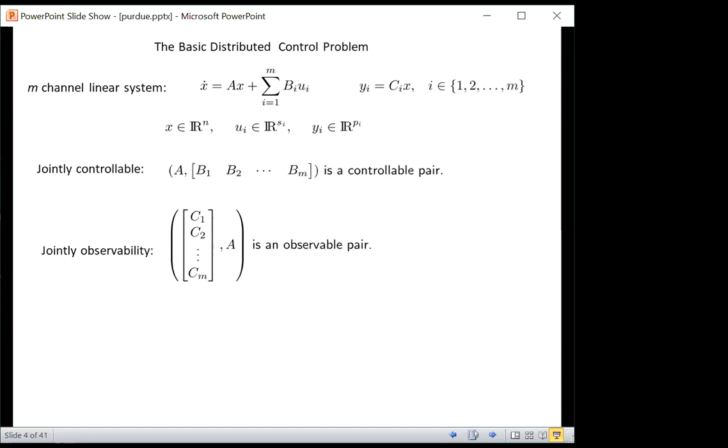So say a little bit about what an agent can do. An agent can only adjust input UI and can only utilize a vector W of signals which it gets from its neighbors. The specification of who agent I's neighbors are is part of the problem formulation.

Let's let script N sub I denote the set of labels of agent I's neighbors, including itself. Neighbor relations are conveniently described by a directed graph, which is called a neighbor graph.

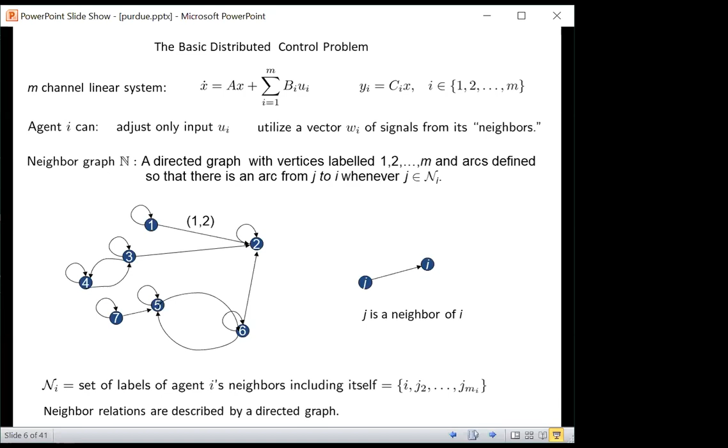So what is a neighbor graph? It's a directed graph of vertices 1 through M, with arcs defined so that there is an arc from vertex J to vertex I whenever agent J is a neighbor of agent I. A very simple idea. Here's a picture of a typical neighbor graph, and what you notice is that there are self-arcs at all vertices because each agent is taken to be a neighbor of itself.

What about this vector W? In the case of distributed control, W is a vector of signals which are available to agent I. W consists of its output and the outputs of its neighbors, and a bunch of other vector-valued signals.

These signals should be thought of as part of the state of the controller for agent I. So this is part of the state, and this is the rest of the state. The distinguishing feature is that Xi is shared, whereas Zi is not.

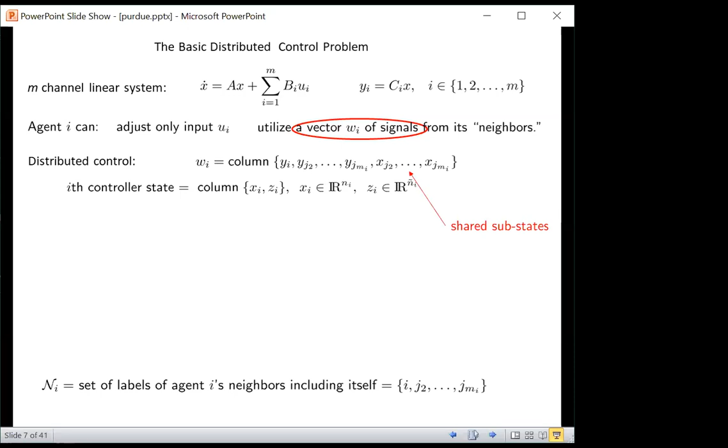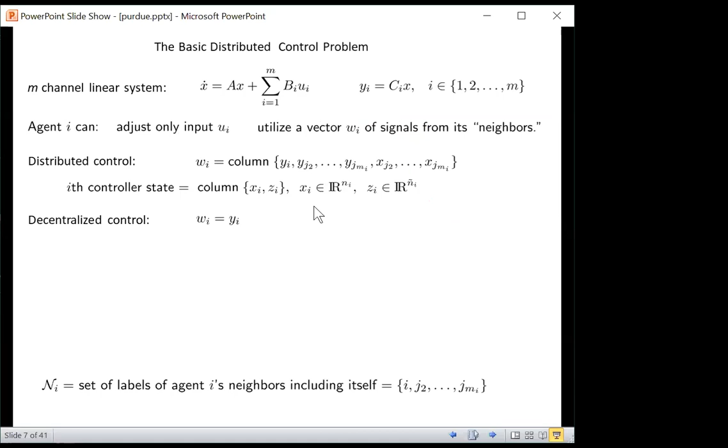Agent I knows the shared substates of its neighbors, or say it gets those by communication. We can contrast this with decentralized control, in which case agent I only knows its own output and nothing else. There's no network involved, and in this case, the ith controller state is just Zi.

In either case, by a local control, we mean a linear system into which goes Wi and out of which comes Ui. This system is going to be of dimension Ni plus N wiggle I, the dimension of these two states. So with this much of a setup, we can state the problem.

The problem for a given Ni is to find integers Ni wiggle and an Ni plus N wiggle dimensional linear controller which exponentially stabilizes the system with a prescribed convergence rate. That's the problem, which to me is the number one problem in distributed control. Surprisingly, it's a problem which has not really been addressed very much in the literature, probably because it appears to be hard.

One way to try to solve this problem is to use what I'll call distributed observer-based control. So this is a lot of words. The first thing I want to do is to tell you what I mean by observer-based control. Then the next thing I'm going to do is tell you what I mean by distributed observer. And then I'm going to put those two things together to get a distributed observer-based control.

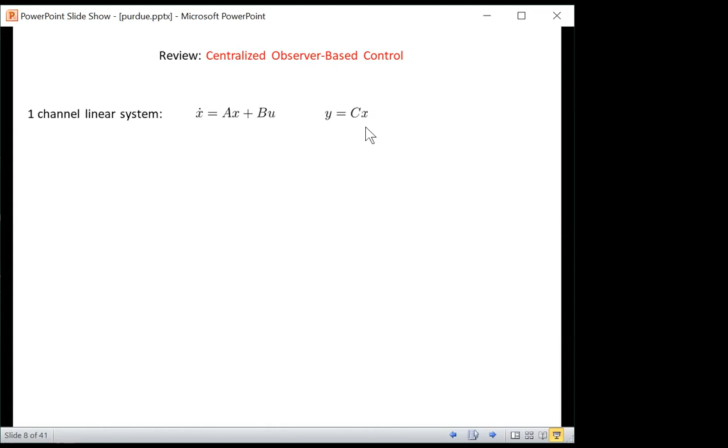So first, just a brief review of centralized observer-based control. Most of you have seen this before. One starts with what we could call a one-channel linear system, a standard linear system.

The first step would be to design a state feedback law to endow the closed loop with some desired properties. And F could come from any one of a number of places. It could come from a pole placement algorithm, it could come from a Riccati equation if one is doing linear quadratic optimal control, or it could come out of an H infinity problem. It's a very general thing, and I'm not too concerned about that.

So the problem with this is that X is not presumed to be known. And so what one does is appeal to the concept due to Herbert Simon from the 1950s called certainty equivalence, which says to replace Fx with an estimate Fx hat. X hat is intended to be an estimate of X, and to treat it as if it's correct even though it may not be. That's what certainty equivalence means.

And if you do that, the dynamic of the process changes to this. And the next thing is to write down an equation for an estimator. This is the typical equation for either an observer or for a Kalman filter. One chooses the matrix K to give the matrix A plus KC some desirable features. Again, if it's a Kalman filter, using a Riccati equation.

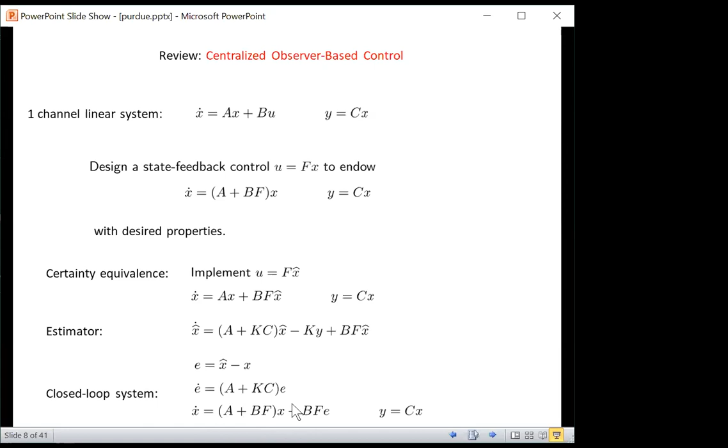We're not going to dwell too much on this, but I am going to emphasize one point, which I'll call the cancellation rule, which has to do with where this comes from. The cancellation rule means add to the estimator the same signal which is going into the process. So you see it right there.

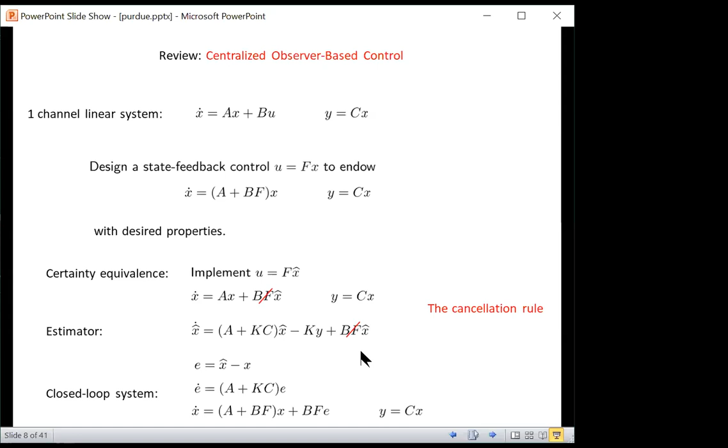The reason for doing this is when you do the calculation to compute the differential equation for the state estimation error, these two quantities cancel. That is the effect of that is what I mean by the cancellation rule. This, of course, is all well known, but perhaps this point is not being emphasized enough. And in the case of distributed control, this becomes a big deal. So I will return to this point later.

Next, I would like to talk a little bit about the idea of a distributed observer. So in words, the distributed observer idea is for each agent to build an observer, possibly with communication between agents, so that each agent is able to get an asymptotically correct estimate of the system state.

Surprisingly, even though people have been talking about distributed observers and distributed Kalman filters for, I would say, 20 years, only in the last 4 or 5 years have provably correct distributed observers begun to emerge under reasonably general assumptions. There are many, many open questions. For example, there's still no really solid theory of distributed Kalman filtering, or in fact, there probably never will be.

Maybe what one needs to do is to change the concept of a Kalman filter for the distributed case. I don't know, but it's still very much an open area, and even distributed observers is an evolving subject, and there are many observers, 5 or 6 I can think of, with different properties. I'm going to be talking using one in this talk.

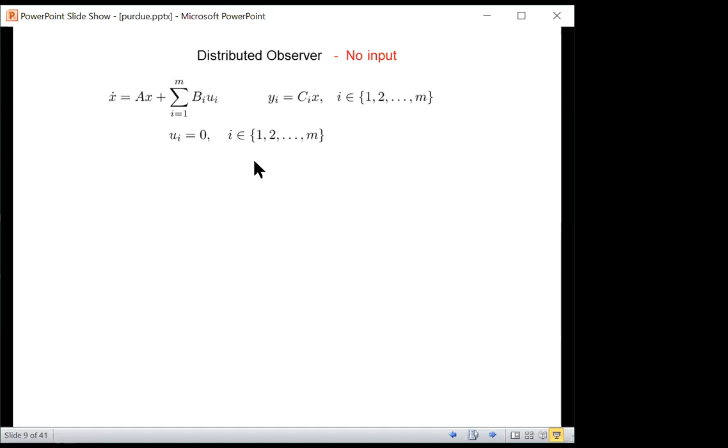All the observers are for the multi-channel system, but I'm first going to talk about the observer with no input. So we're going to assume that U equals 0. Why? Because just about every distributed observer out there assumes that the input is 0, or it is some signal with some very special properties, like it goes to 0 or something like that. The problem with having non-zero inputs, I'll point it out a little bit later.

So the observer in particular that I will be discussing is this. Don't worry, I'm not going to go into the details of these equations in any depth. I will say that the integer q is picked from the set of integers 1 through m, and it could be any integer. Delta iq is the Kronecker delta, which means if i is not equal to q, the differential equation involves all these terms except for the last one. When i equals q, we get the add-on of this system.

So agent i uses, for all agents except the qth agent, an equation like this, and the qth agent uses an equation like this with this term added. The dimension of the states of these subsystems are all n, because each xi is supposed to be an asymptotically correct estimate of x. And the dimension of z turns out for the observer I'm talking about to be m-1, where m is the number of agents.

So that's kind of a picture of the observer, and there are a lot of matrices here which one would choose in order to make the observer have some nice properties. But rather than go into that, I'm not going to.

Let me just find the state estimation errors, just as what I did for the centralized case. The dynamics give rise to an error equation like this, and the z equation can be written with e's on the right. We call this the error dynamics. If you look at it, like the centralized case, it's a system of differential equations with no forcing function—sort of an autonomous system.

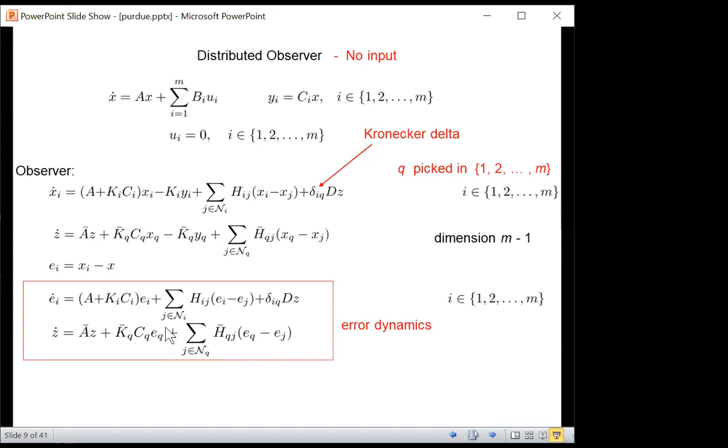The idea of this observer was developed by Nuno Martins at the University of Maryland and his student Parks, and they published a paper on this which appeared in the Transactions of Automatic Control in 2017. It's a nice observation. I think one of the more interesting things is that they discovered that in order to make progress with this, they needed to appeal to classical ideas from classical decentralized control, and I will say something about that a little later on.

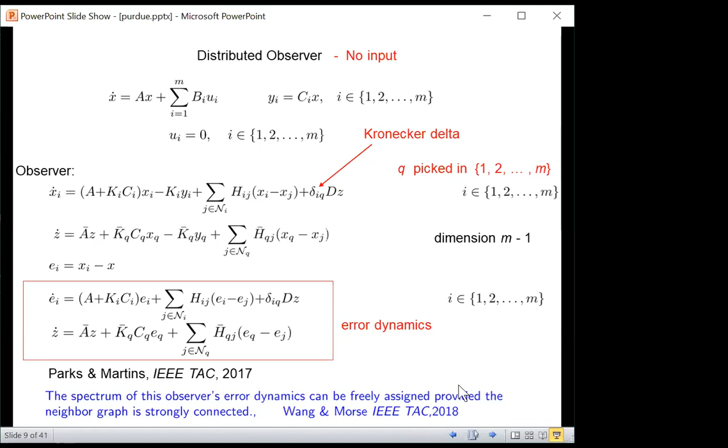A little more recently, it was shown that this particular observer's spectrum can be freely adjusted or freely assigned, provided the neighbor graph is strongly connected. There are other results, but I think for this talk that's fine. That's a paper that appeared in the Transactions Automatic Control in 2018. So that's pretty much the story with this distributed observer at this point.

So what I want to do now is to look at how one would use an observer like this when there's an input, which is what we need for distributed observer-based control.

So when there's an input, instead of having ui equal zero, we're going to have ui equal Fi x as the first step in the design, and the Fi's would cause the process dynamics to take on this form. Just like in the centralized case, the Fi's can be determined using pole placement, Riccati equations, or H-infinity optimal control. There's really no limitation on how the F's should be chosen, determined by the fact that this is going to be a distributed problem.

So the next step is to note that we can't use X because X is not known to anybody. So we use certainty equivalence and replace X with Xi, where Xi is the state estimate of X generated by local observer i. So this is what agent i implements.

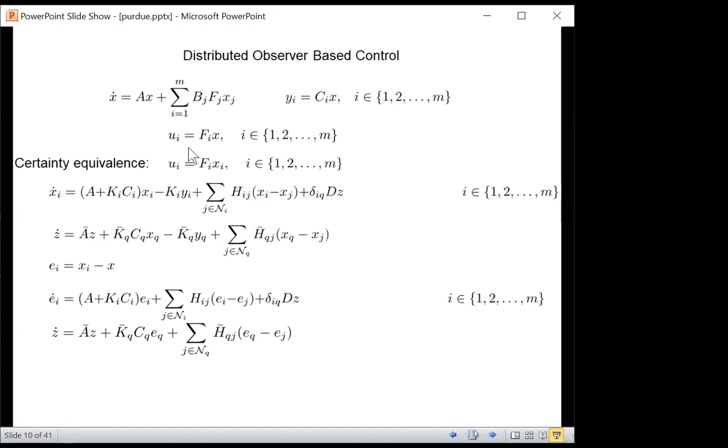Now we have to worry—and that changes the process dynamics to something like this—about the cancellation rule, if we want to end up with an error system that looks like this. And we want that so that we can get this decomposition of the spectrum, of spectra, which we got in the centralized case.

So that says what we should do to make sure the cancellation rule holds is add this term to each of the local observers—this term being the same term that appears here. And that indeed will give error equations that look like this, which is what we want.

Unfortunately, we can't do this without violating the rules of the problem, because J can take on values for which X sub J is not a neighbor of agent i—J ranges from 1 to M. So this won't work. So what do we do?

So you stare at this and you scratch your head, and eventually you say, hey, wait a second—all of the Xi's are supposed to be providing asymptotically correct estimates of X. So if that's the case, why do we have to use Xj here? Why not try using Xi and see what happens?

At this point, I want to pause for a second because I know there are students listening, and I want to say something about research, because this is an example of how research goes. When you start trying to do a new piece of research, generally you start with what you know, and then you have to jump off into the darkness and guess, maybe using a heuristic or intuition or something. You guess that maybe this idea will work—that's part of the creativity of doing research. If you're not willing to do that, you shouldn't be doing research. And if you are willing to do that, then you can't stop there—you have to make sure your idea makes sense. If it happens to be an experimental idea, you run an experiment. If you're developing an algorithm, sometimes you can justify that by just running simulations.

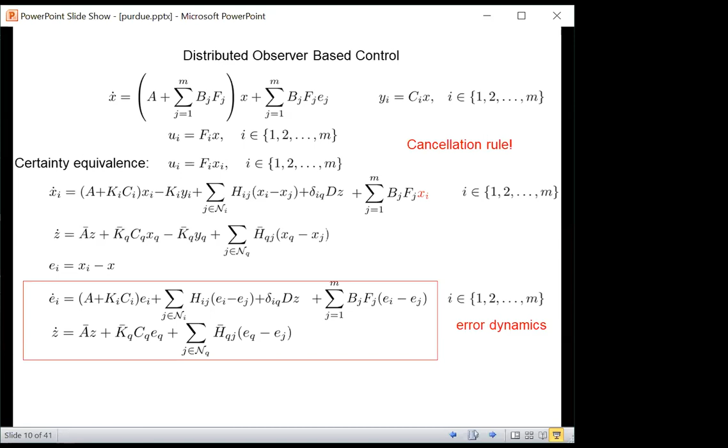All is well. What one can say is this, and this is the theorem: no matter what the Fi are, the spectrum of this observer's error dynamics can be freely assigned, provided the neighbor graph is strongly connected. This particular fact is proved in a paper which has recently been submitted for publication in the IEEE Transactions on Automatic Control.

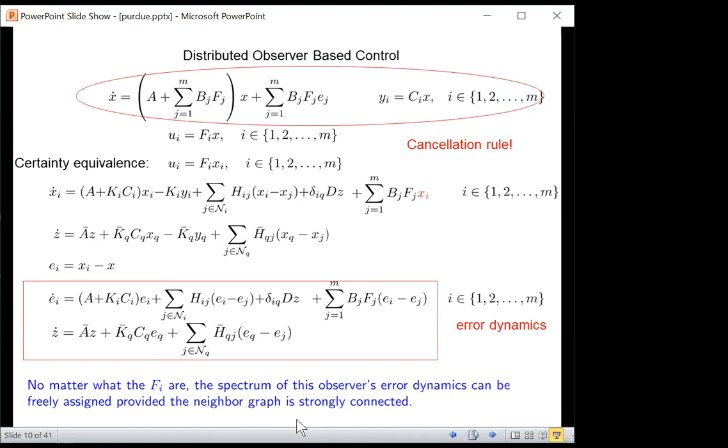And there are various generalizations of this without making the strong connectivity assumption.

So what are the implications of this, which maybe are more important than the theorem itself? The implication is that any jointly controllable, jointly observable, multi-channel linear system with a strongly connected neighbor graph can be exponentially stabilized with arbitrarily fast convergence using time-invariant distributed control. And the way this was established was with an observer-based distributed control.

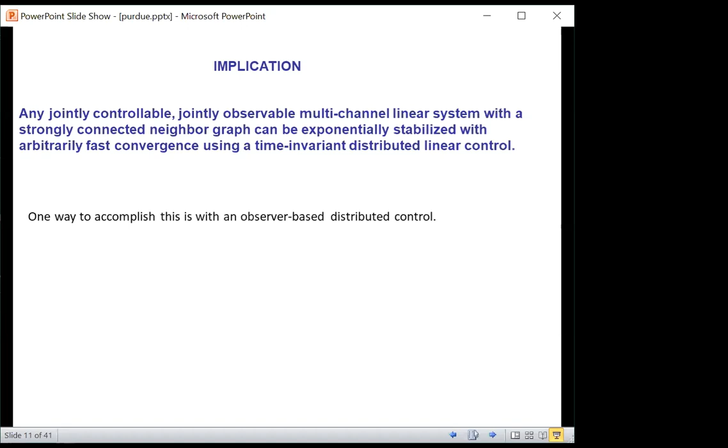Let me now remind you of what the distributed control problem was again. And the reason I want to do that is because there might be some people in the audience, and I know there are certainly some people in the world, who are going to be a little uneasy with this particular approach to distributed control because it relies on an observer.

There was, for example, a paper written by John Doyle in the late 1970s, which pointed out that the use of observers can be problematic—it can introduce robustness issues. And so there are people who prefer not to do things using observers.

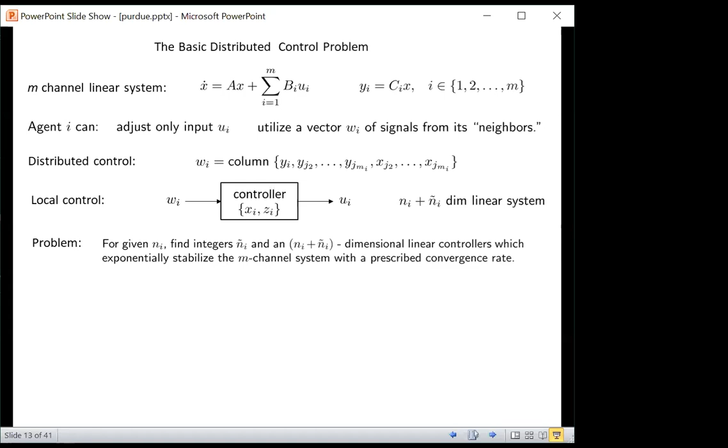And so with that in mind, we asked this question: are there ways to address the problem not necessarily using an observer? Now, I'm not going to answer that question completely, because that's a big question with many dimensions to it. What I am going to do is sketch some of the ideas that really need to be respected if one tries to answer this question, in the hopes that other people may come along and contribute to this problem and come up with better ways to control the system than the distributed observer-based approach mentioned here.

So the first thing I want to do is talk about something I'll call the extended system. This is a very simple-minded idea. The first step is, let's assume that each agent introduces a bank of integrators of dimension ni.

And once that's done, since each agent knows its own—the bank of integrators are going to be part of the controller that agent i implements, and so agent i certainly knows xi. So we should take what it knew before, namely this, and add to it xi. So xi is also shared across the network.

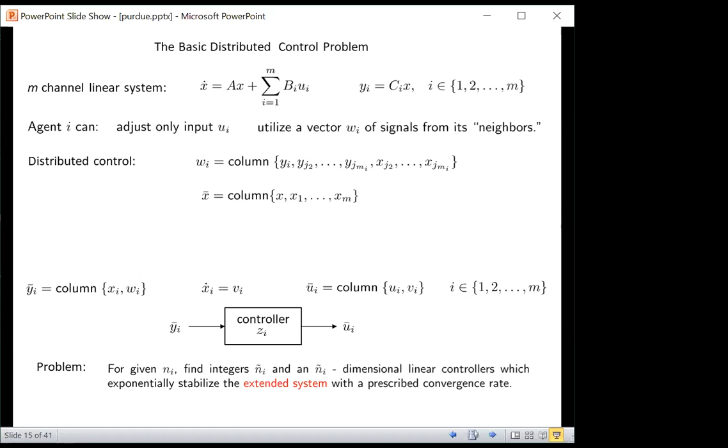So the state of the extended system would be the state of the process and the state of the banks of integrators. It would just be a system that looks like this. Its output is yi bar and the inputs are ui bar. No big deal. Notice that the controls would look like this.

If you stare at this for a second, you'd say this actually begins to look like a specially structured decentralized control problem, because the network has already been taken into account. So if you want to make progress with the problem, you should at least be familiar with the basic results from decentralized control.

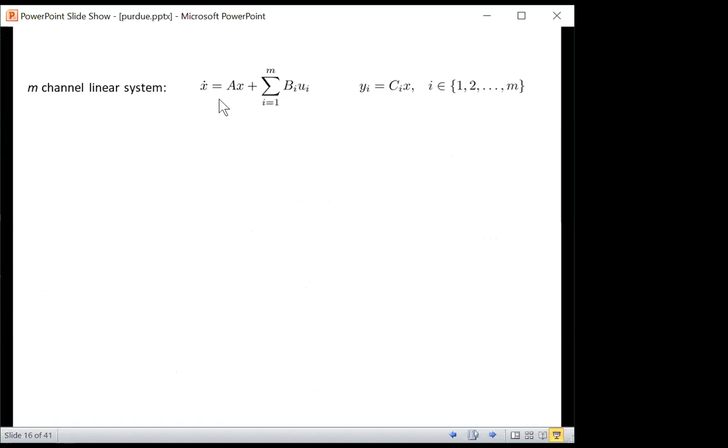I want to review some of these. So I'm going to do this for an M-channel linear system. This is the classical decentralized control problem, and this is a review.

Agent i tries to build a linear controller whose input is yi and output is ui, and then apply it to this system. The problem is to devise local controllers, one for each agent, which endow the resulting closed-loop system with prescribed properties such as stability. That's the basic decentralized control problem, studied in the 1970s.

There's a classical result which says this: there is a uniquely determined set of eigenvalues called the fixed spectrum, which is a subset of the closed-loop system spectrum, no matter what controller is used, as long as it's time-invariant linear. This result is due to Shih-Ho Wang and Ted Davison, going back to the early 70s.

I want to emphasize that as soon as you see fixed eigenvalues, you probably think about what happens if you have a centralized system which is not controllable or not observable, so you get some fixed eigenvalues. This is not the same thing, because the system is assumed to be jointly controllable and jointly observable.

This is much more complicated, and even to this day, an intuitive understanding of what the fixed eigenvalues are does not exist, in my opinion. There are ways to test for fixed eigenvalues, but intuitive understanding, like there is in the centralized case, does not exist. It's quite complicated.

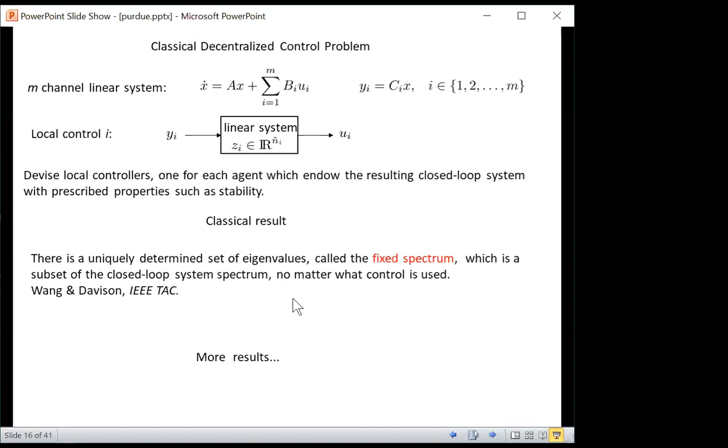So let me mention a few more results. This fixed spectrum is a critical one. There's something called the system transfer graph, which is a directed graph on M vertices with an arc from vertex J to vertex I, whenever the transfer function from channel input J to channel output I is non-zero.

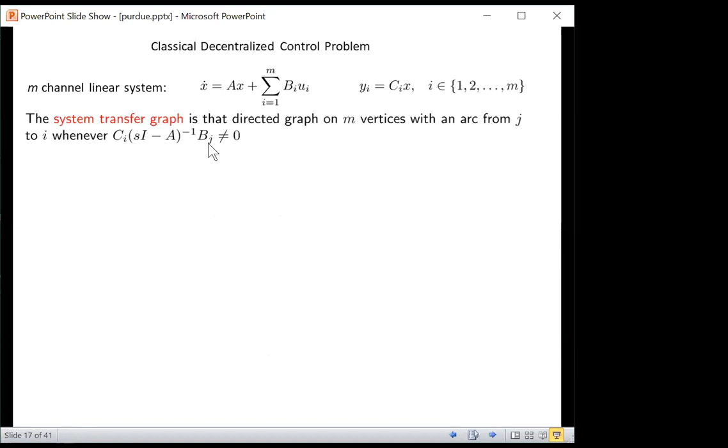Then one can state some results. These are also classical, a merging of various classical results. Suppose the system's transfer graph is strongly connected. Then the closed loop system spectrum can be freely assigned with decentralized control if and only if, for each subset of the set of integers 1 through m, the rank of this matrix — called a pencil or singular pencil — is greater than or equal to n for all complex numbers s.

S appears here, where p bar is the complement of p in the set of integers 1 through m, and c bar and b bar are appropriately defined. Sometimes in the literature you'll see, for each p, p bar is called a complementary subsystem. So this is an important result.

I also mentioned that lambda is a fixed eigenvalue of the system if and only if this equation fails to hold for some value of lambda and some subset of p. So these are the critical results from decentralized control, which apply to the problem we're looking at now.

This fixed characterization of eigenvalues holds even if the system transfer graph is not strongly connected. This characterization, by the way, is due to Clements and Brian Anderson — I forget Clements' first name.

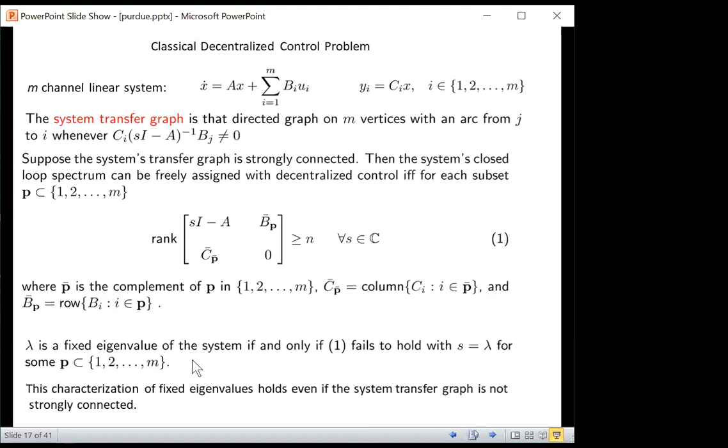My wife just sent a text message, and you might have heard the ding.

Okay, so we'll go forward. What did I just do? Okay.

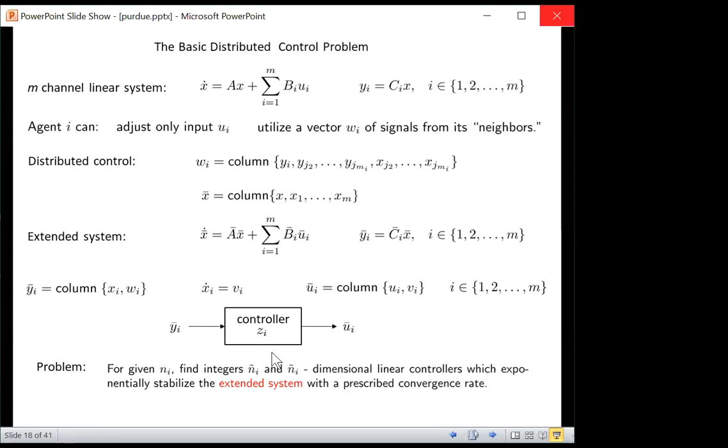So here's the distributed control problem again, and we have those tools in our pocket. We're trying to find a controller which does nice things to the extended system, because that is solving the distributed control problem. So what do we know?

We need something called the rank deficit, which is the difference between the dimension of the system and the minimum rank of this matrix pencil as P ranges over all subsets and S ranges over the spectrum of A.

This particular number is always greater than or equal to 0, because one possible choice of P is when P is equal to this whole set, in which case this is the empty set, and we just have a pencil with A and all the B's, and we know the rank of that is N. So the minimum rank of this cannot exceed N, and therefore delta must be greater than or equal to 0.

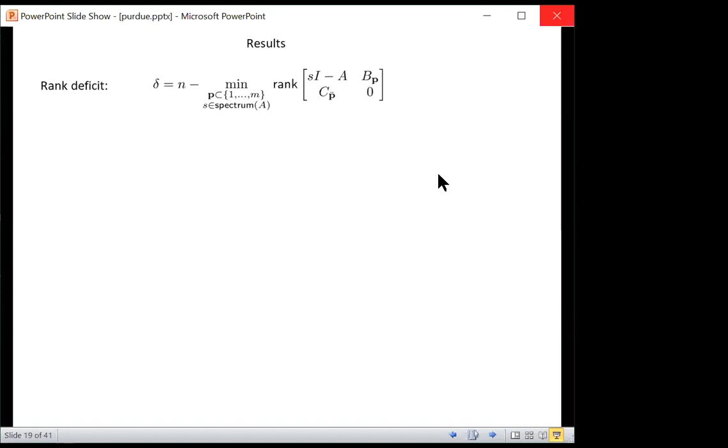So here's a theorem. Suppose the neighbor graph is strongly connected. If all of the dimensions of the shared states are greater than or equal to delta, then the extended system has no fixed eigenvalues. So what does that mean?

If in addition the inequalities are all strict, then the closed loop spectrum of the original system can be freely assigned with distributed control.

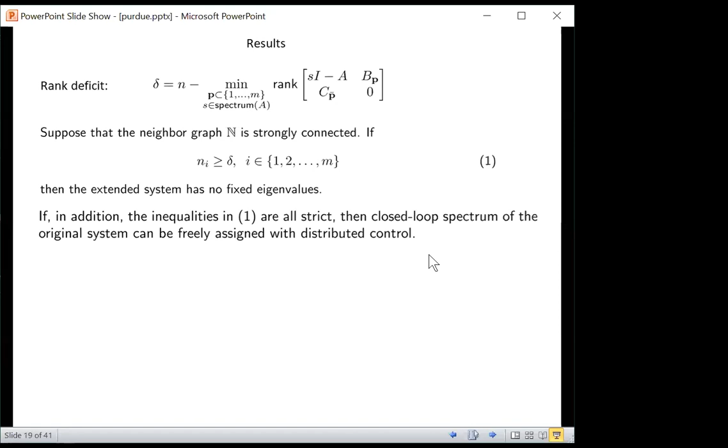So what this says is it gives conditions under which one can adjust the spectrum without any statements about observers. And to me, this is a starting point for new research.

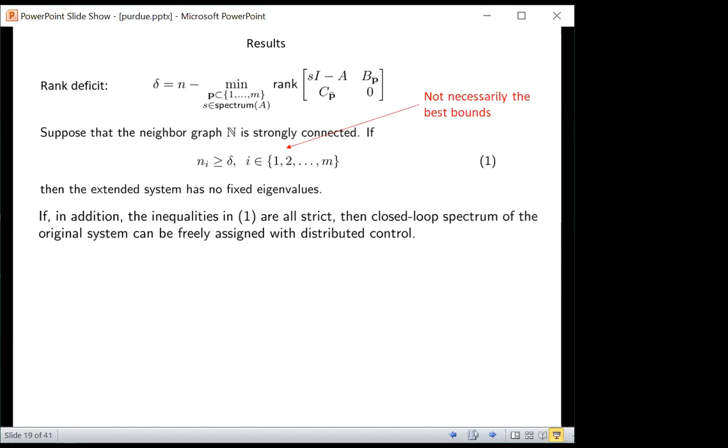These bounds are not necessarily the best, so there's research to be done there. The preceding conditions hold whether or not the measured outputs are shared across the network, which is kind of an interesting observation. So you don't get anything by sharing the measured outputs. The above statements do not depend on strong connectivity of the original transfer graph.

Examples show that if all the Ni equal 0, meaning there are no shared states and the only measured outputs are shared across the network, it's not necessarily possible to stabilize with distributed control, even if the neighbor graph is strongly connected. A little bit of a surprising fact.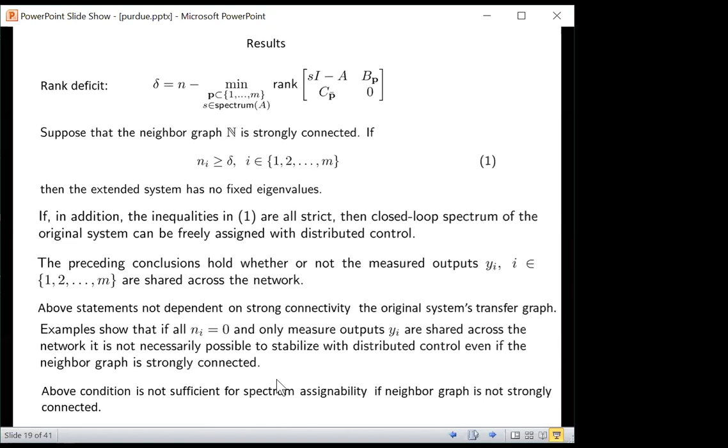The above conditions are not sufficient for spectrum assignability if the neighbor graph is not strongly connected. So just a bunch of facts.

So let me go next to talk about an application of the ideas we have just discussed. I'll call this distributed multi-agent set point control. So again, one starts with an M-channel jointly observable, jointly controllable linear system.

The objective is to construct a distributed control system which enables each agent to independently and precisely set its output yi to a desired constant reference point ri. So it's kind of like a decoupling problem. Each agent can independently do this, except it's a distributed decoupling problem.

So the way to do this is to introduce integral control, one of the greatest ideas in all of feedback control, in my opinion. So one introduces an integrator.

Oh, I should have mentioned that the y's are scalars. I went too fast through this point in order for this to make sense. In this particular application, let's assume the y's are scalars.

So one forms the error between y and the set point value we'd like y to take on, and that error then drives an integrator.

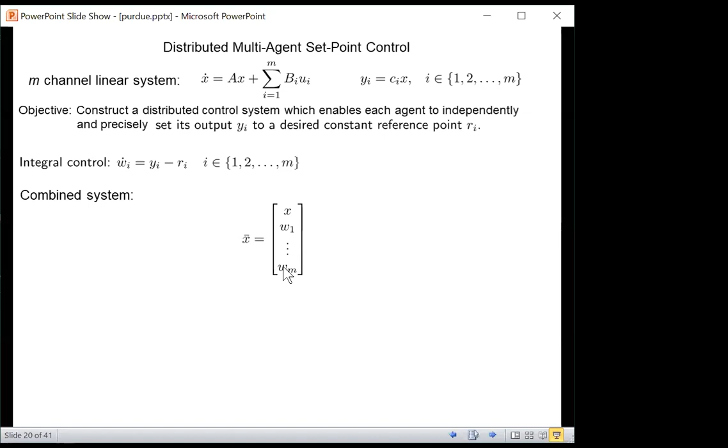Then the next step is to combine these integrators with the original process. So the combined state would look like this. It would be the states due to the integrators and the state of the process.

One defines an extended output because agent I not only knows yi, he knows wi. And we're going to have an input due to the constant reference signals. If you do all this and write down the state equations, you get a system that looks like this.

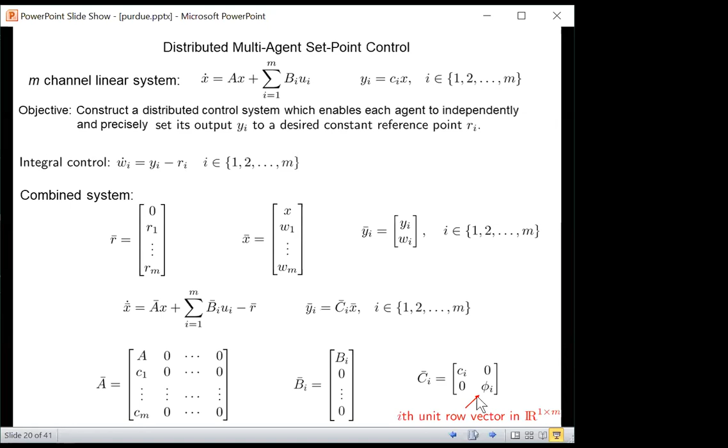So the first point I want to make is that's easy. These are the matrices that are involved. I don't think this is particularly important, but there they are, where this is the ith unit row vector. Worry not about them. What is important are the controllability and observability of the system.

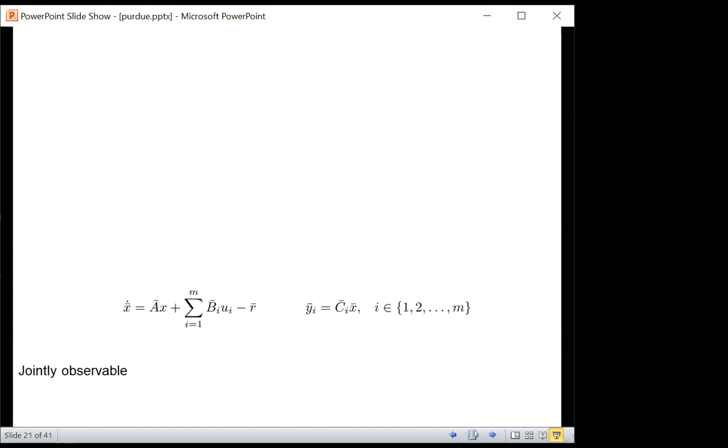So this system is jointly observable, and that's not surprising because it was observable before we added the integrators, and the integrators are added in such a way that agent I can observe its state. So it's not surprising one doesn't lose joint observability.

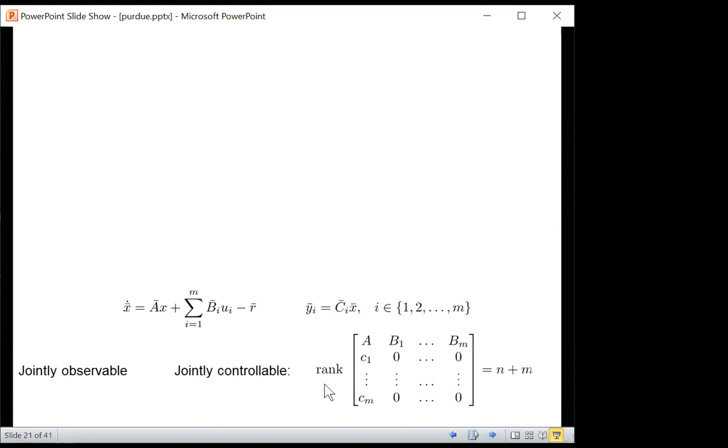But joint controllability is a little more tricky. One has a condition that must be satisfied, and this is the condition that has to hold. To demystify this, let me just say that this condition means that the transmission zeros of the transfer matrix of the original system cannot have any zeros at s equals 0.

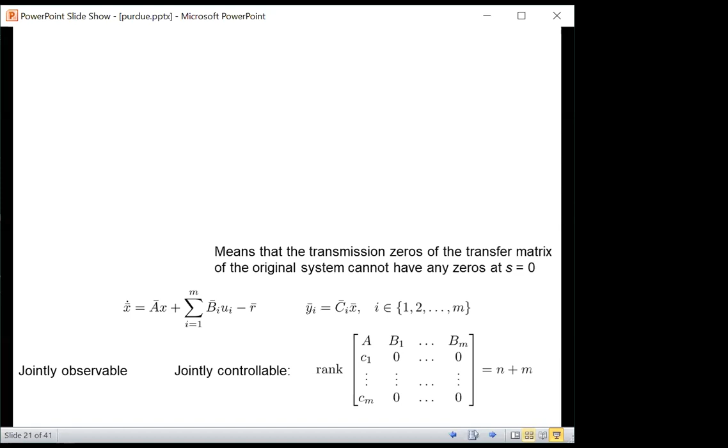And that is not surprising because we're using integral control. Even in the centralized case, if you have a single input, single output linear system to which you want to apply integral control, if the transfer function has a zero at 0, that's going to cancel the pole due to the integrator and cause problems. So when you do integral control, you can't have that. And the same kind of thing emerges in the decentralized case.

And the idea of transmission zeros is part of a linear multivariable control theory. So how do we actually, assuming these conditions hold, construct and solve the problem?

The first step is to construct a stabilizing observer-based distributed control for the unforced system, so this R is not there. We know how to do that because we have joint observability, joint controllability, and strong connectivity.

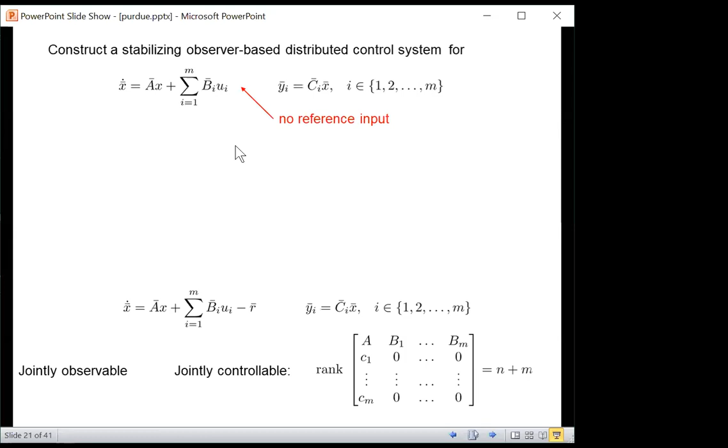Having accomplished that, the control, without a reference input, is then actually applied to the system with a reference input. And you can ask, hey, what happens if you do that?

The answer is that it works because of integral control, even though the limits to which the state estimator errors converge are not necessarily zero. What is true is that all signals in any stable, time-invariant, linear system with constant external disturbances converge to finite constants. That's well known.

Thus, since the output of each integrator converges, the input to each integrator must converge, so that if the signals are all converging to constant values, then the thing forcing the integrators must converge to zero, and we've got a solution to our problem. That's the beauty of integral control.

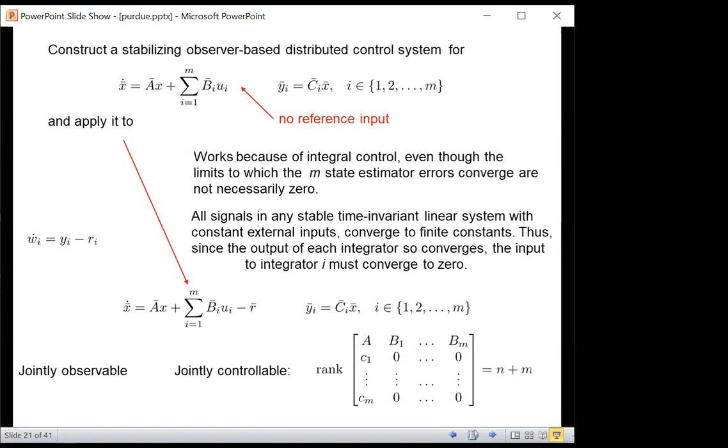So it's very simple to do this, and it's just an application of the distributed control idea. The last thing I want to talk about, which is really a topic still very much in a state of development, is transmission delays.

It's not common. There hasn't been much work studying the effect of transmission delays on distributed control, distributed estimation.

Now, if we're going to talk about transmission delays, you can either be a hero first time around and do this for continuous dynamics, in which case you're faced with delay differential equations. It's not the end of the world, but delay differential equations introduce their own complexities, and there's enough complexity without introducing the delay differential equation.

So the problem I'm going to talk about evolves in discrete time, where we can avoid that complexity by using lifting. The comments I'm going to make are for a multi-channel linear system evolving in discrete time, perhaps from a sample data system.

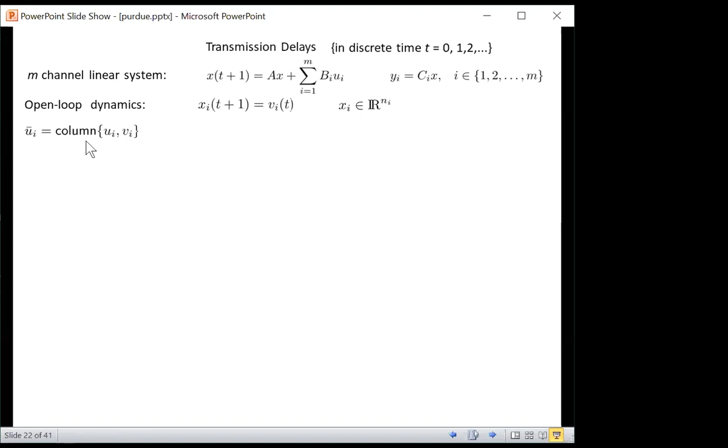In this case, we're going to consider first open loop dynamics. This is analogous to the integrators. And then we're going to extend the input to take into account the VIs, just like we did in the continuous time case.

What we're going to do is consider controllers of this form, where y-i-bar is a signal consisting of various quantities. If there were no delays, y-i-bar would be yi and perhaps the outputs of the neighbors of agent i, which I've not written down here, and the state of agent i, as well as the shared states of agent i's neighbors.

So this would be directly analogous to what one is doing in continuous time, and the same ideas apply, the same results hold, the analogous results.

However, if we're interested in delays, instead of having available the states of agent i's neighbors, we have only available the states of agent i's neighbors after some delays in transmitting those states across the network. So there are given transmission delays, which we're going to assume are constant and integer-valued. And what we want to do is control the system in the face of these delays.

So to model this system as a standard linear system without delays, one uses lifting. What do I mean by that? First, we need to define what is meant by the follower of an agent.

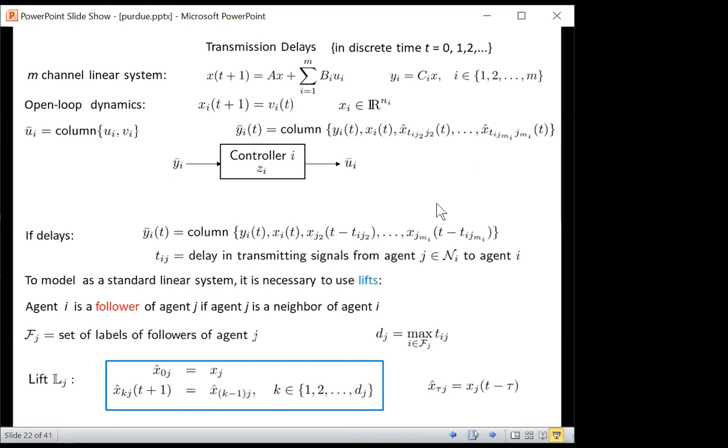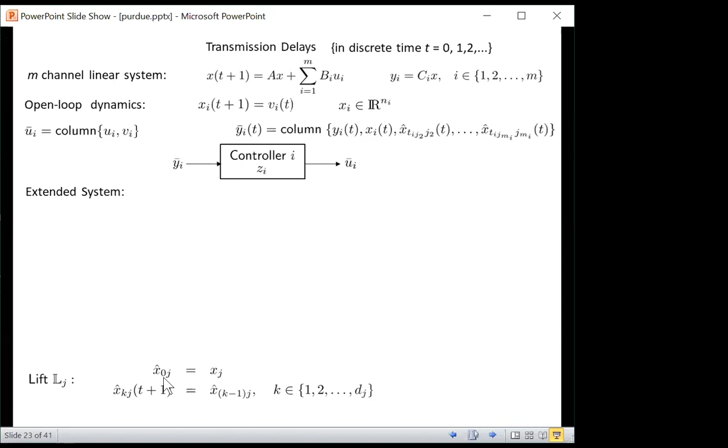If one does that, then finally one ends up with a system whose inputs are these guys, whose outputs are these guys, but this system has not only this dynamics, but it also has the lifts. So when one builds the extended system, one has to take lifts into account. That does present a bit of a problem.

So the state of lift Li is this, and the state of the extended system is X, the Xi's coming from here, and the states of the lift. So it's a big state. And just like any other extended system, it is a linear system, which is going to have feedback that looks like this. So one, again, is confronted with a distributed control problem, which really looks like a decentralized control problem. So one worries about fixed eigenvalues.

Now, one thing I'll say about this, which is maybe not obvious initially, if you go through these steps, what can we say about these delays as far as controllability and observability of the extended system? Well, not surprisingly, the introduction of these delays does not affect controllability, because agent j can control Xj, and Xj drives this whole system. So controllability is not really affected. Observability, on the other hand, is.

And the effect on observability is to introduce fixed eigenvalues of the extended system at zero. The extended system is not jointly observable. So there's some fixed eigenvalues at zero, which come about because of the lifts. So that means that if you try to do the obvious thing and apply the ideas I've talked about before, there are going to be some fixed eigenvalues at zero.

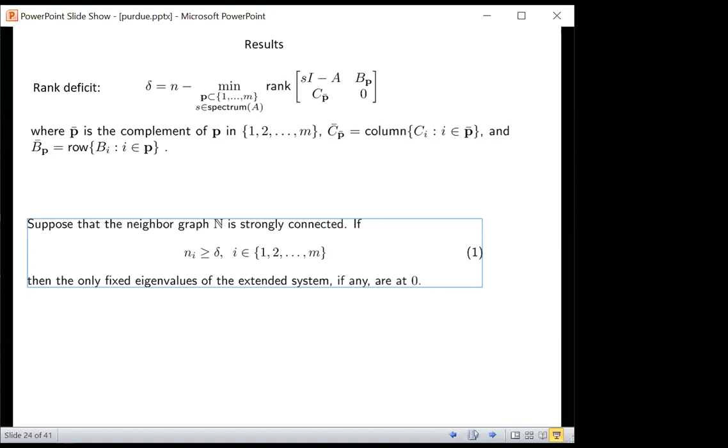And here's the result. If the neighbor graph is strongly connected, and the dimensions of the xi's are bigger than the deficit, then the only fixed eigenvalues of the extended system, if any, are at 0. And those fixed eigenvalues come about because of the lifts.

Various things to say about this. The first is, fixed eigenvalues at 0 do not affect convergence rates in discrete time. They're all at the origin. So you can have as many fixed eigenvalues at 0 as you want. They can be repeated eigenvalues. It just does not affect convergence rate because they're at 0.

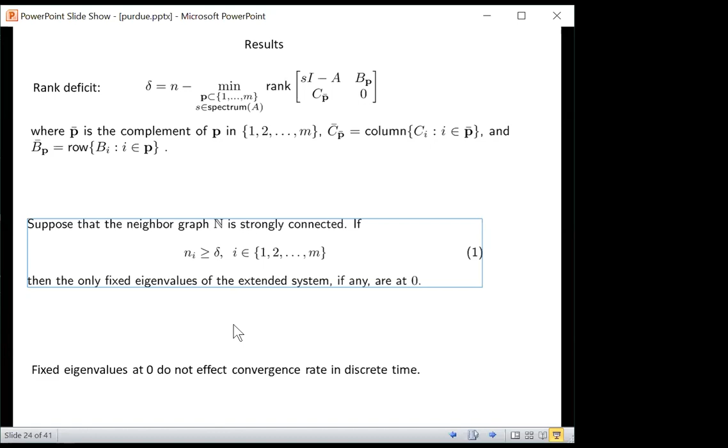So you could stop at this point and say, okay, I'm done, as long as I choose the dimensions of these states xi large enough, then I'm going to be able to control the system. However, you could go further than this. Let me just make some comments.

So this is the definition of yi that I had on the previous slide. And I'll say it's impossible to avoid fixed eigenvalues at 0, no matter how large the ni are. And that's obvious because of the loss of joint observability. However, all fixed eigenvalues, including those at 0, can be avoided for ni sufficiently large using a different definition of yi.

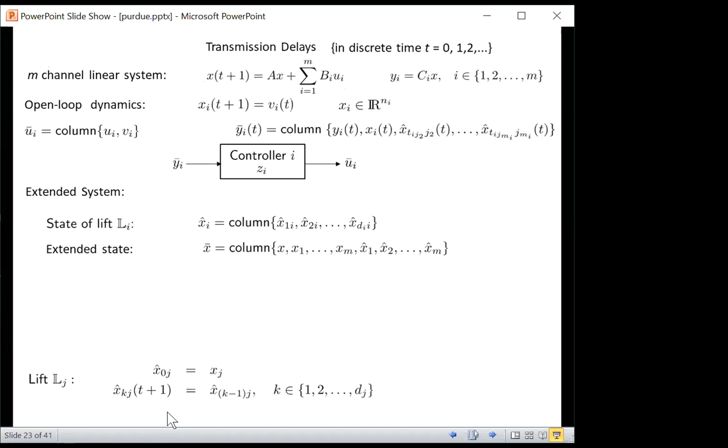And these states are the outputs of the delays. In other words, these are, if I go back to the preceding slide, these are the fully delayed states, delayed for the maximum amount of time. I have it written right there.

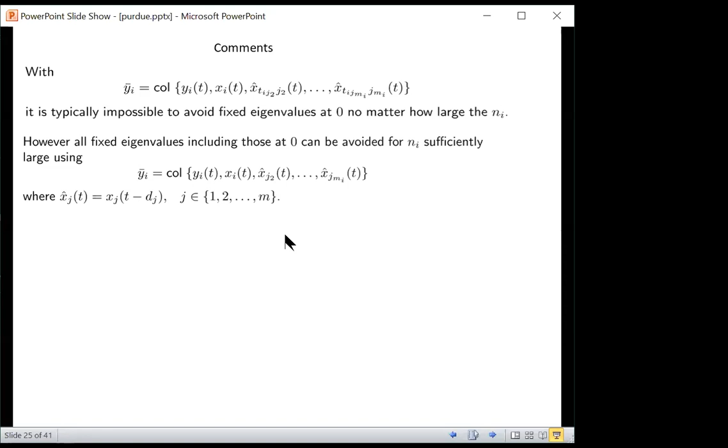So you can avoid the fixed eigenvalues at 0, interestingly enough. But doing this requires each agent to hold its state before transmission to agent i just long enough so that at time t, agent i receives this particular state rather than this state. So you have to delay the transmission before you start the transmission by the difference between d sub j and t sub ij, which is not attractive.

The other thing, this in turn requires that for each j, lift Lj play the role of a hold, like a sample hold, and be implemented as part of agent j's controller, rather than just part of the description of the system. And while these ideas enable one to eliminate all fixed eigenvalues, they also complicate controller structure and introduce additional delay in the system.

Finally, I'll say there are intermediate solutions which are possible. And in my opinion, this particular subject of when to use holds and when not to use holds, the whole subject is in need of more study. There is some development of these ideas in the paper I mentioned before, which has been submitted to the transactions. Let me conclude with a couple of remarks.

This presentation has identified certain architectural requirements needed to address the basic distributed control problem for a multi-channel linear system, with and without network transmission delays. While the results presented assume the neighbor graph to be strongly connected, similar results are also known for the case when the neighbor graph is assumed to be only weakly connected.

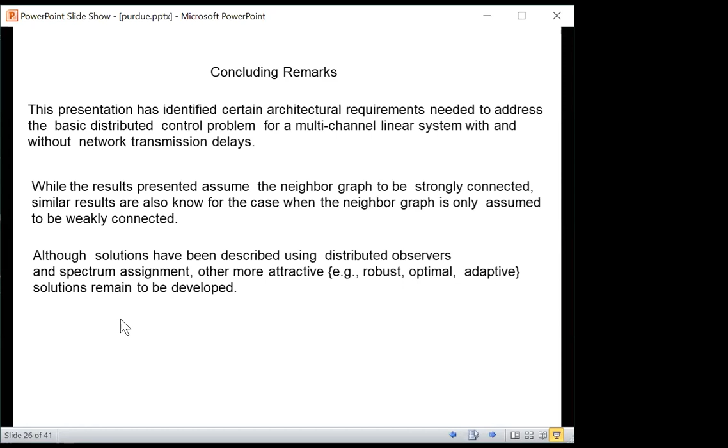Although solutions have been described using distributed observers and spectrum assignment, other more attractive solutions - robust, optimal, adaptive solutions - remain to be developed. These are challenging issues, especially things like adaptive and optimal.

Any such solution will have to use the architecture components defined here. In other words, they're going to have to use the components that were described. There's clearly a lot of work to be done in this area, and my hope is that this particular work that's been done so far kind of opens the door to a lot more research in this area.

Let me go on now to switch topics completely for the fun part of the talk. I was spot on, it's 11:01.

Let's talk a little bit about control engineering at Purdue in the mid-1960s. I have to admit, in all honesty, I'm a bit uncomfortable about this because I'm admitting to my age, and I don't like doing that. I like to lie.

So first, let me just mention what the basic control group in electrical engineering was. I was in the electrical engineering department. The head guy was a guy named Jack Gibson, who wrote a book way back then on nonlinear control. The book is still available. He was a reasonably well-known guy.

I was a graduate student at the University of Arizona in Tucson, and he came to visit, and he managed to recruit me. So I came up to Purdue, and there was a group - Violet Haas, I know you know who she is because she was a member of the control group.

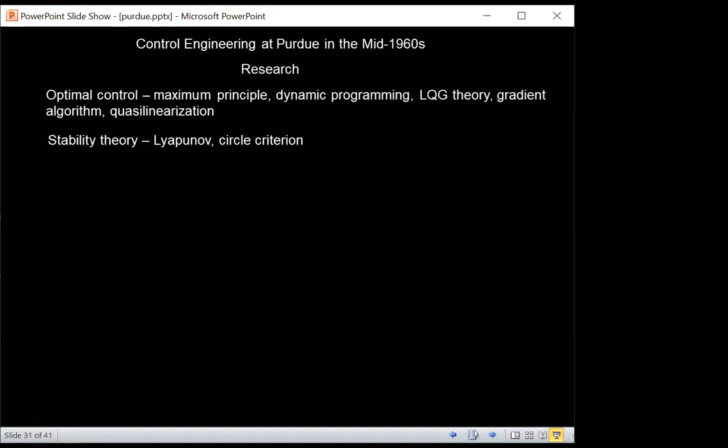Another area of research, maybe less so but still active, was stability theory, nonlinear stability theory, and Lyapunov functions were certainly around at Purdue, and the circle criterion had been developed in the early 1960s by various people, not at Purdue, but it was certainly being studied. Stochastic control was another area of study.

Nonlinear control, I think the main tool in nonlinear control was describing functions. There was absolutely no nonlinear geometric control theory. That did not develop until the 1970s.

Differential games were very popular back then. In fact, I studied differential games. It was part of my doctoral thesis. The name Rufus Isaacs, who was not at Purdue, but he was a big name in differential games.

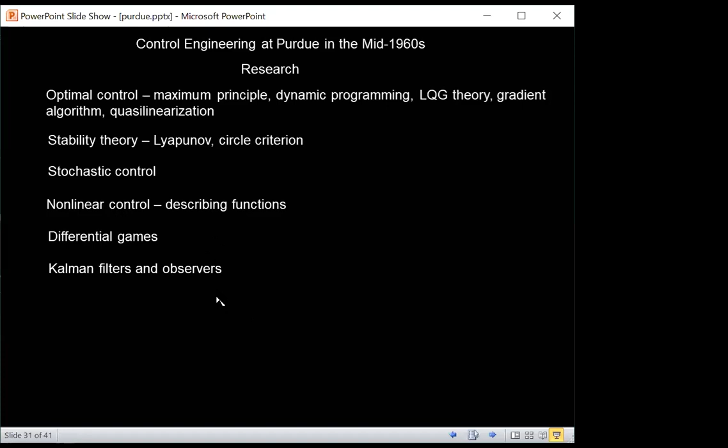And of course, Kalman filters and observers. Observers had just been invented a year or two earlier, I think, by Dave Luenberger. Kalman filters were a little bit older. Realization theory, controllability and observability, and things related to that were certainly being studied. And that was also Kalman's work, which had actually come originally out of the circuits field.

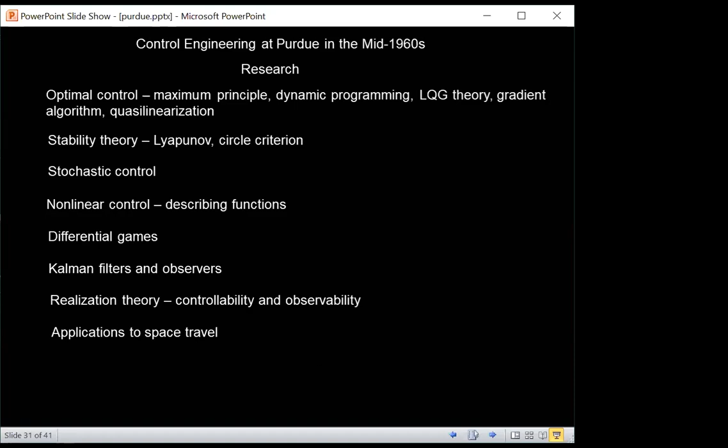There were applications to space travel, which I was involved in. This was in the 1960s, so it was before the United States went to the moon, and before the United States really made much of a presence in space. I'm trying to remember the story, there was something to do with Sputnik, which goes back to 1957, but I can't remember the story. But what I can remember is that there was a group of us at Purdue during my graduate days who worked on something called Model Vehicle Number 2.

Model Vehicle Number 2 was a post-Saturn V class vehicle, a real big vehicle, and we were concerned with controlling it. Like Saturn V, it had gimbaled engines on the bottom, and you controlled it by swiveling the engines. The thrusts were not under control, they were pre-programmed. And the problems were extremely challenging because of the size of the vehicle. So things like bending frequencies and bending modes became important and became part of the control problems. And so we studied that.

Purdue was one of four universities in the United States funded by NASA to work on, I believe, Model Vehicle Number 2. Eventually that whole program was scrapped, like many programs in the government.

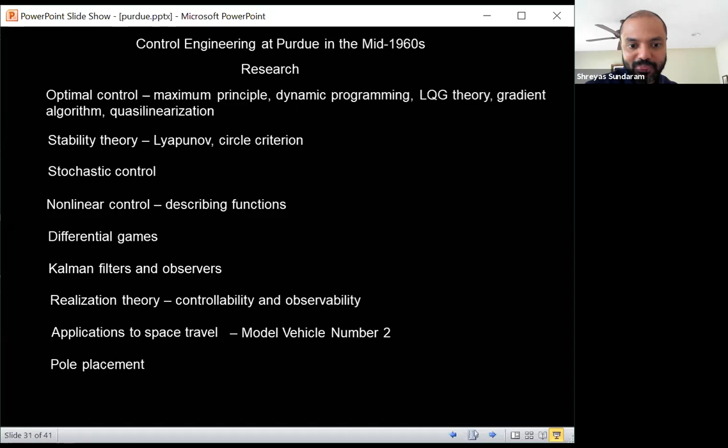Finally, there's pole placement, and I want to tell a story about pole placement. I actually have a movie, but I'm a little worried about time. How much time do I have? Yeah, we've got essentially until noon, and if people drop out, that's totally fine. But this is essentially why we're here, so please take your time with it. All right, let me move to the movie. I was debating whether to do this, but I think I will.

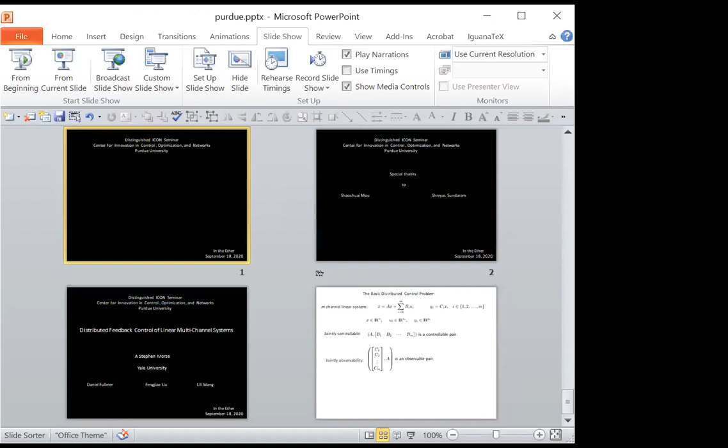Oh, that's not it. Okay, so what does this have to do with broccoli? What does pole placement have to do with broccoli? Here's the answer, and this does have something to do with Purdue. Well, first I should show this movie.

You can't hear sound. You can hear that? We couldn't hear that. Oh well, that's very unfortunate. That's George Bush Sr. saying: I do not like broccoli. I don't like it, since I was a little kid my mother made me eat broccoli. I'm not going to eat any more broccoli.

That's a famous bit. And what does that have to do with the story I'm going to tell? So I've used this in presentations, and what I start by saying is, I don't like optimization. When I was at Purdue, all I studied was optimization. I'm not going to use optimization anymore. And that's just to make people laugh. And what does that have to do with...

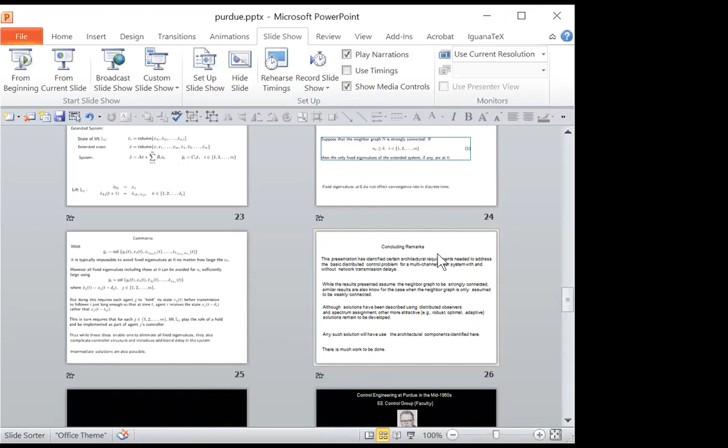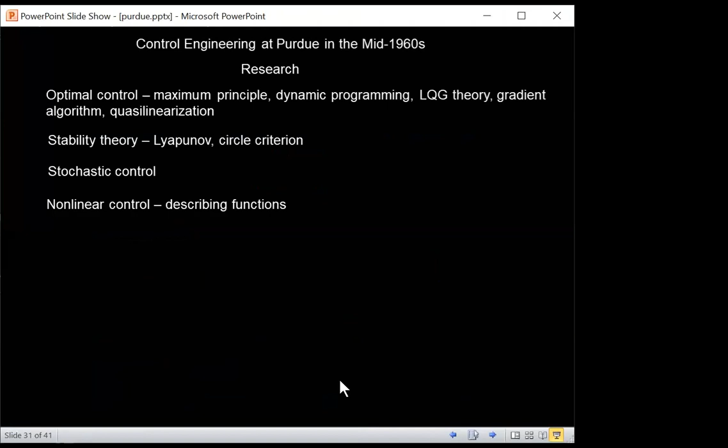...pole placement. So here's the story. When I was at Purdue, people were kind of fanatical about optimization, it was excessive. During my stay, some guy came in, this was before the pole placement theorem came up. Some guy came in to give a talk on placing the poles of a linear system under state feedback. And his idea was to set this up as an optimization problem. So the problem was to adjust the coefficients of the characteristic polynomial of A plus BF with the entries of the matrix F. And the entries of the matrix, the characteristic polynomial of A plus BF, of course, determines the eigenvalues.

Unfortunately, the coefficients of the characteristic polynomial of A plus BF are nonlinear, actually multilinear functions of the entries of the matrix F. So if you set up an optimization problem, it's fairly easy to set up such a problem, where if you could find the minimum, you would have a solution to the pole placement problem. But the catch is you can't find the minimum because the optimization problem is highly non-convex.

The reason I mention this story is because it's a perfect example of what I would call very uncreative research. When I got done at Purdue, I went to NASA Research Center in Cambridge, Massachusetts, and Murray Wonham was there, and he had just proved his pole placement theorem. He didn't use any optimization at all.

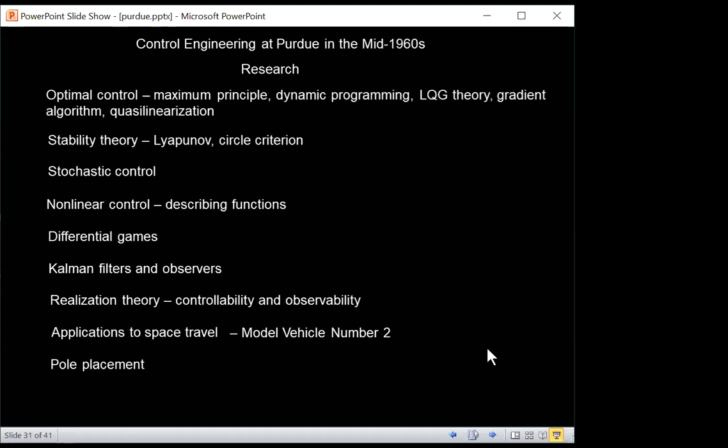Okay, I'll go on a little further now. So I mentioned some notable visitors that came to Purdue during the years that I was there. The first one was Manfred Thoma.

Thoma, you may know, was a very active member of the International Federation of Automatic Control and retired recently. There's an award in his name, and I believe Ming Cao, who was my student, was the inaugural winner of the award, but I'm not sure. Anyway, there's an IFAC award in this guy's name.

Thoma was a very nice guy, a very funny guy. He's German, so his English was a bit abrupt. I remember having a conversation with him one day, and asked him—he said he was going to go on vacation. I said, where? He said, to the West. He was going to visit about 6 or 7 states. I said, how long are you going to take to do that, since he's driving? He said, 2 weeks. And my eyes rolled. If any of you have been in the West, you know you can't get very far in 2 weeks visiting 6 or 7 states.

Another guy who I think you all know, who visited Purdue in the 1960s, was Rudy Kalman. I won't say anything about him, but I will say that when he visited, I had no idea he was a celebrity, a big deal. I was just a young graduate student.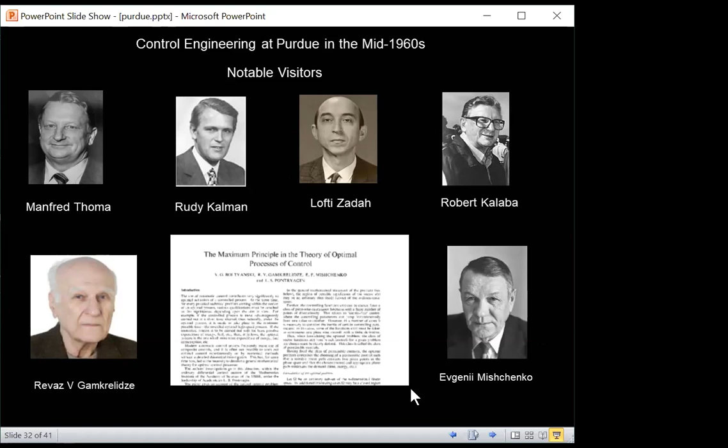So let me go on and talk a little bit more about a notable Boilermaker who was at Purdue. I'm not talking about the International Brotherhood of Boilermakers. I'm talking instead about Bob Griese. Bob Griese was the quarterback of the Purdue football team, at least during one of the years that I was there, and Purdue went to the Rose Bowl.

My comments now are really directed towards the international students about this. I strongly urge you to go to a football game after the pandemic, not because you have to be a great lover of American football, but because it is a happening. It is an experience which I think you will enjoy because it's so unusual. There will be things like tailgate parties before the game, and the behavior of the fans is a little crazy. Everything about the event is unusual, and it's worth going just for the fun of it. Sort of like going to a World Cup soccer game, I guess, a similar kind of thing. So I urge you to do that.

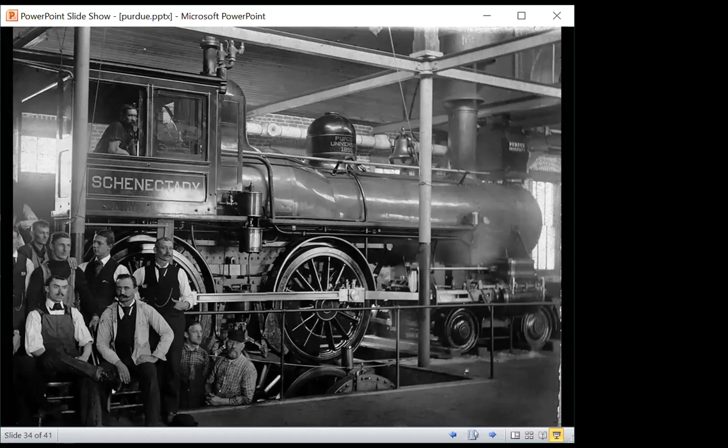Researching this talk, I was led to this Boilermaker sign by accident. I was not led to it by Googling Boilermakers, I was led to it by Googling locomotives and Purdue. Unfortunately, what I was looking for, I never got, but what I did get was this. This is where the name Boilermakers, I don't know if it's where it comes from, but it's closely related. This is a steam locomotive given to Purdue. It's called the Schenectady, and it comes from Schenectady, New York, which makes me think it has something to do with General Electric, which was in Schenectady.

If you look carefully, you'll notice that it says Purdue University, 1890 something, so this goes back quite a few years. The reason it went to Purdue is because this was an era in which steam engines were really a big deal as far as commerce is concerned, and people wanted to make sure they were being operated as efficiently as possible. Purdue had some kind of a steam engine laboratory back then, and so Purdue was given this engine to study, to see if they could make it behave better. Through this process, I believe the term Boilermakers emerged.

So what led me to this was not trying to find out where the term Boilermaker came from, but rather something a little different. As it turns out, during the years that I was at Purdue, there was a locomotive on campus. Not only was it on campus, it was functioning. I lived in what used to be called the married student courts, on the corner of State Street and Airport Road. In order for me to get to the electrical engineering building, I'd walk down State Street and start walking across the campus. Not too far into that walk, there would be a railroad track, and on that track was a modern locomotive, not an old steam engine like this, and a coal car.